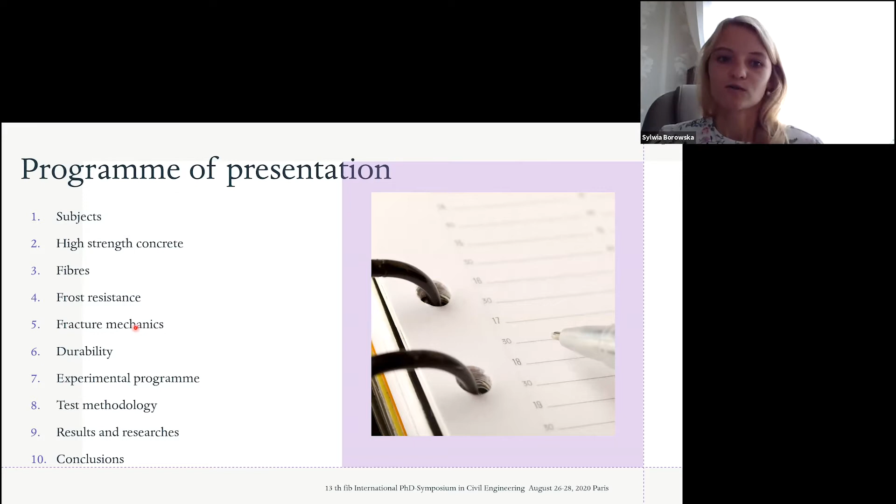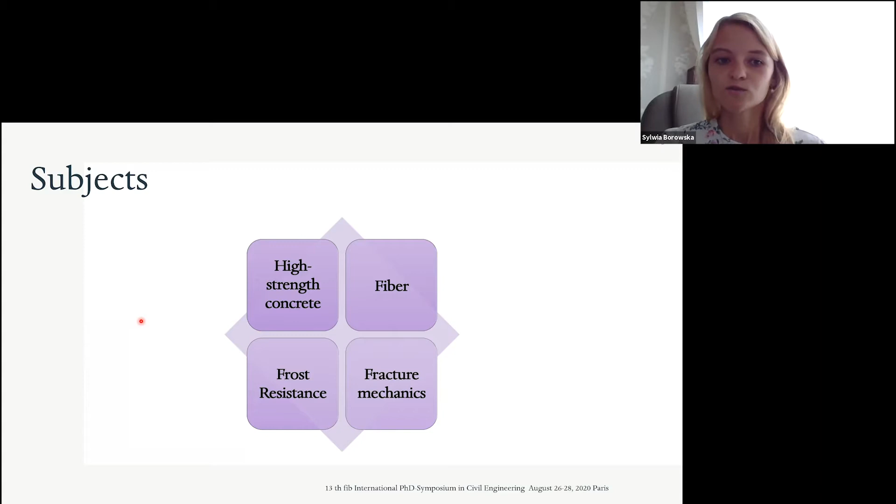My presentation is structured as follows. The aim of the presentation is to describe frost degradation of high-strength concrete by compressive strength change, mass loss, and durability factor change, and then to compare with the modification of stress intensity factor, fracture energy, and crack mouth opening displacement after 150, 250, and 350 cycles of freeze-thaw.

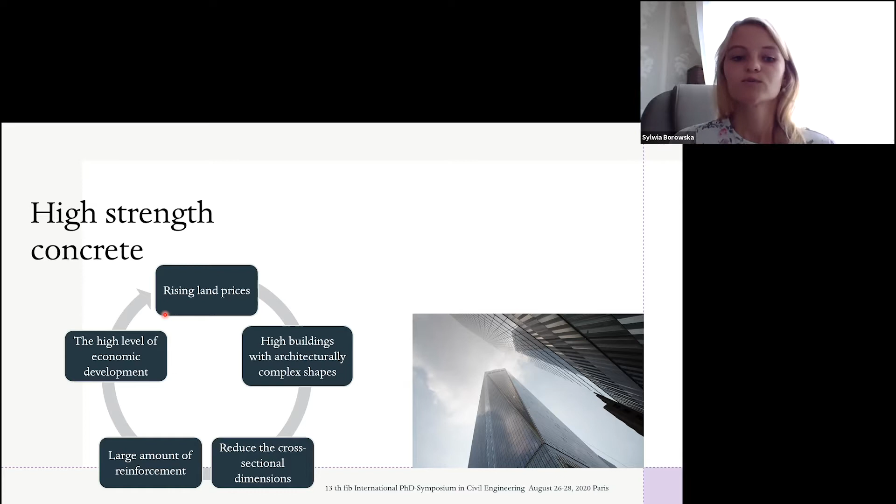The modern construction industry, which aims to create monumental buildings breaking records of height and span, is looking for innovative solutions to use structural elements that are safe in terms of load capacity and resistance to external conditions. Rising land prices in industrialized countries lead to a change in construction trends, with increasingly higher buildings with architecturally complex shapes. Due to the functionality and economical approach of the building, the main reason for using high-strength concrete is to reduce the cross-sectional dimension of the element.

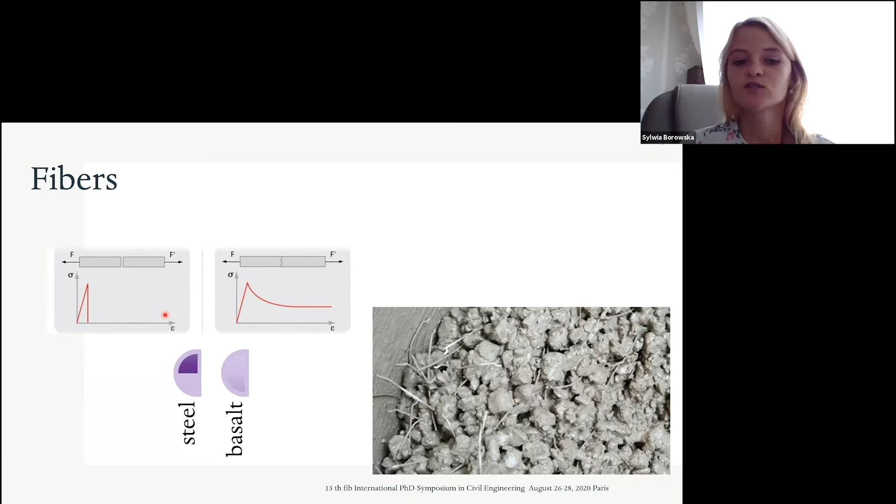High-strength concrete, despite numerous advantages, is a quasi-brittle material. The addition of steel and basalt fibers to high-strength concrete changes it into a quasi-plastic material, preventing a sudden brittle fracture in load condition. Numerous publications and works confirm the beneficial effect of adding fibers on the mechanical parameters, but little attention has been paid to the stability of high-strength fiber reinforced concrete to external environmental factors.

Durability is one of the most important parameters describing modern buildings. It has a significant impact on behavior, appearance, and usability of the objects. In the process of construction, material wearing out results from the destructive influence of external environmental interaction and improper exploitation.

With proper mechanical properties, the durability of the structure under extreme environmental conditions must also be ensured. Concrete not resistant to cyclic freeze-thaw loses its aesthetic appearance and, what is most important, its strength parameters assumed during the design are reduced.

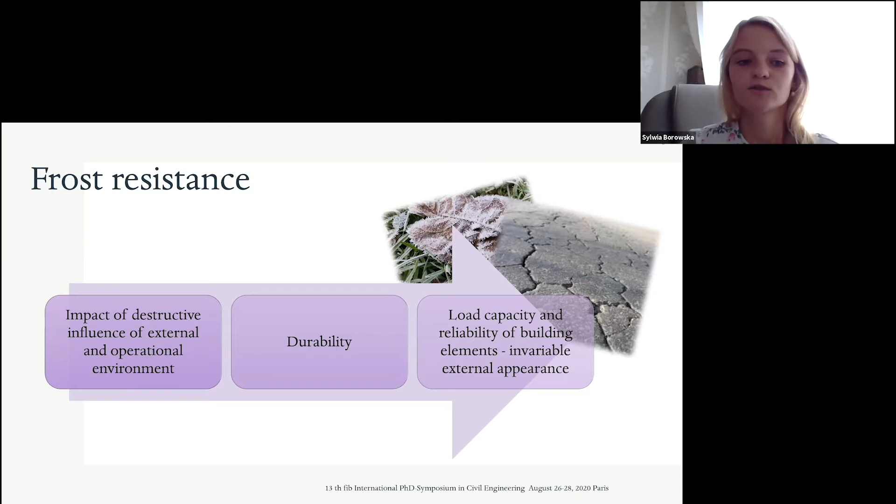Conventional calculations of structural elements are based on the assumption that the materials are an ideal continuum, have no defects, discontinuities, and changes in the structure resulting from the influence of external conditions. Despite the safety factors used in construction dimensioning, the results of analysis are characterized by high randomness. Several discontinuities and defects of material may be the beginning of fracture development.

High-strength concrete is characterized by a rapid increase in initial strength, which leads to the initiation of numerous places with different characteristics of primary deformation. Insignificant in the initial period of existence of concrete elements, discontinuities may, as a result of destructive environmental impact, lead to the catastrophe of the structure.

The connection of fracture mechanics parameters with the degree of damage as a result of cyclic freeze-thaw leads to a more precise description of the integral degradation of high-strength concrete.

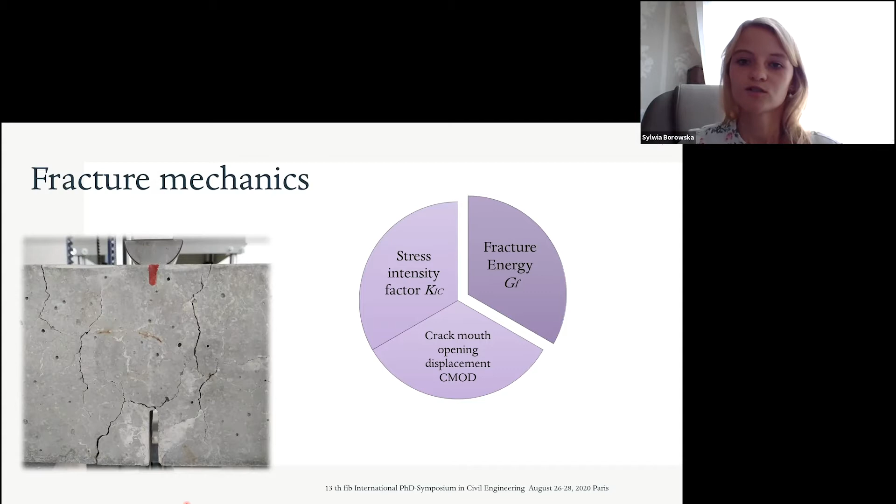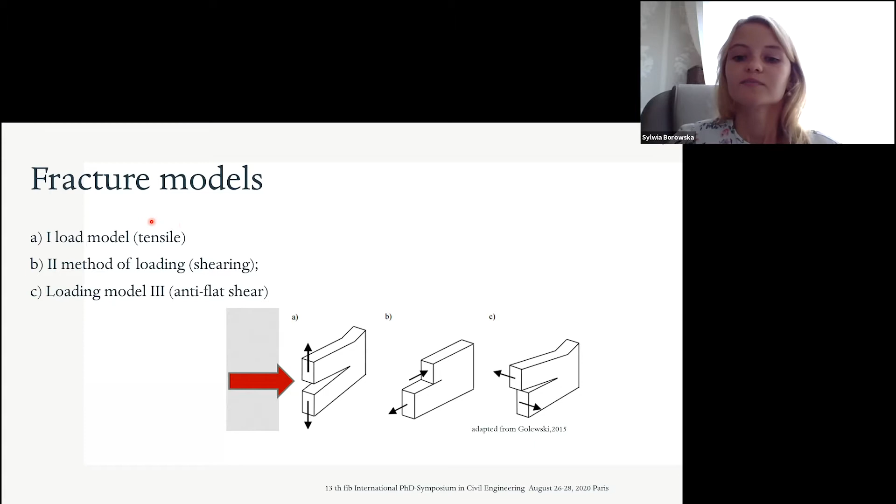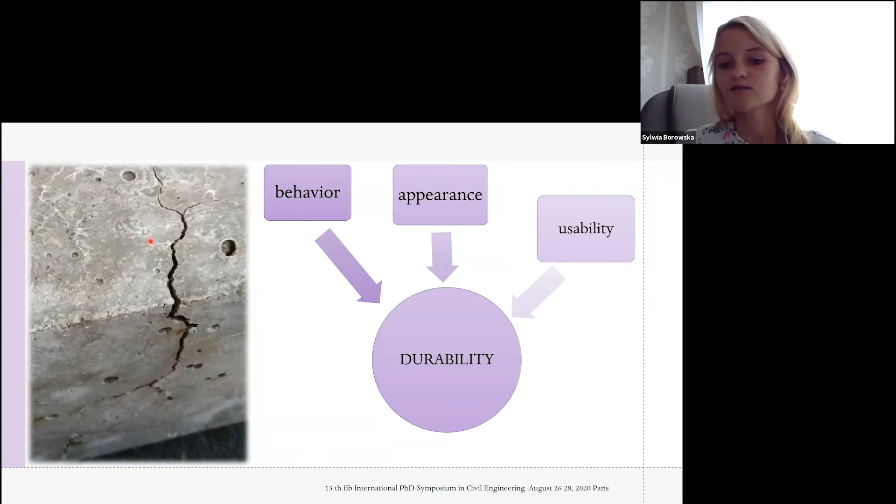In my research, I focus on stress intensity factor, fracture energy, and crack mouth opening displacement. This paper presents the results of experiments concerning determination of the resistance to cracking according to the first model of fracture, tensile and bending. The key point here is the durability of high-strength and high-strength fiber reinforced concrete.

Let's turn to my experimental program. The test was carried out on concrete with a compressive strength of 90 megapascals in order to analyze the effect of addition of fibers to high-strength concrete on their resistance to cyclic freeze-thaw. Steel and basalt fibers were used. In all series, a constant water-binder ratio was provided.

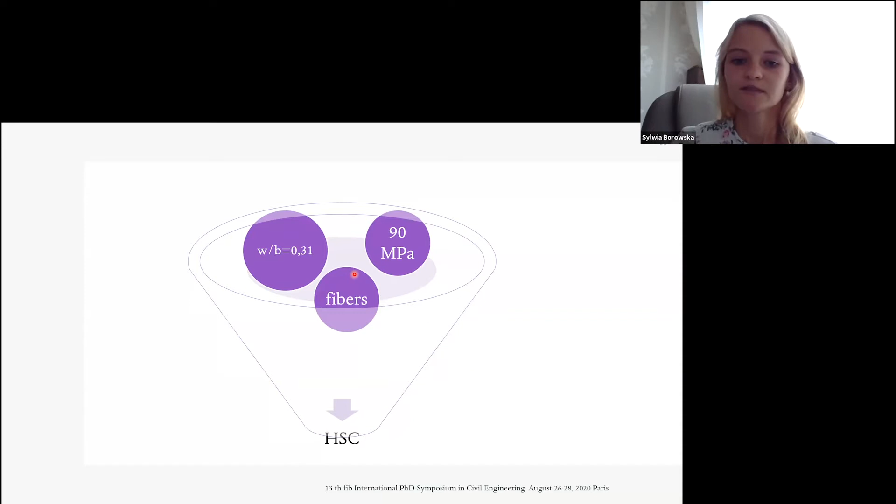For the research, concrete used Portland Cement 1 in an amount of 440.5 kilograms per cubic meter. The max grain size of the gravel used was 11 millimeters. River sand of 0 to 2 millimeters grain size was applied.

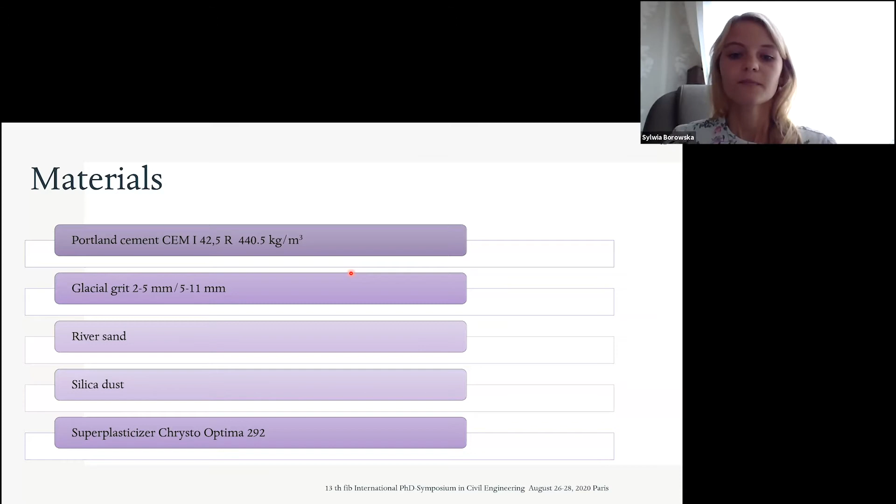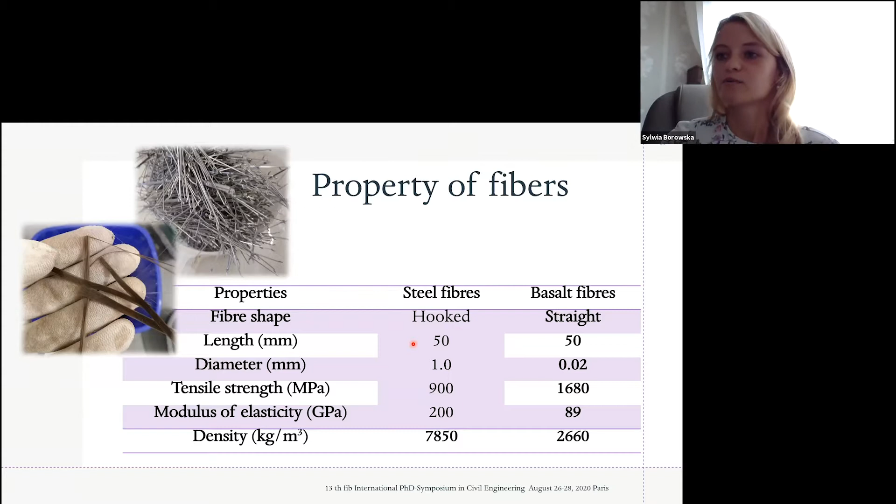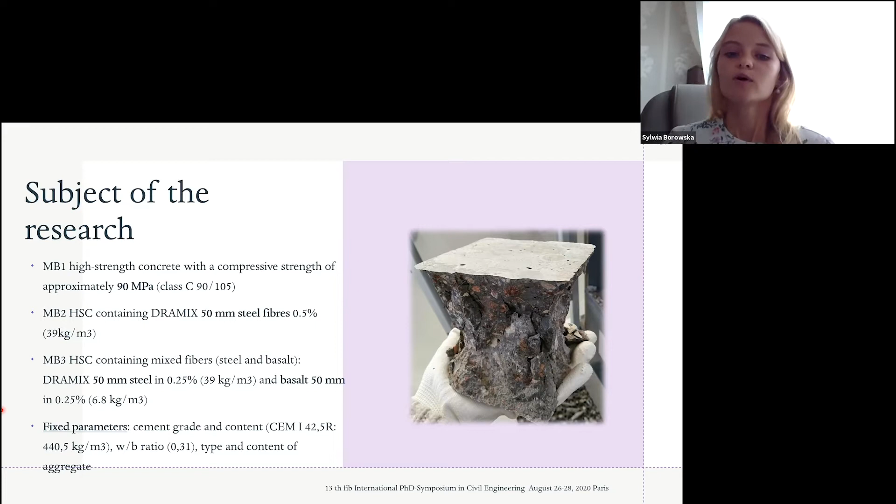The properties of fibers implemented in high-strength concrete are as follows: hooked steel fibers and straight basalt fibers, 50 millimeters long. Three types of samples were made: MB1, high-strength concrete without fibers; MB2, high-strength concrete with 50 millimeter steel fibers in amount of 0.5%; and MB3, high-strength concrete with 50 millimeter long steel fibers and 50 millimeter long basalt fibers, 0.25% each.

Now, I would like to describe sample preparation.

During the mixing process, the aggregate was mixed dry with cement and silica dust, before applying half the water and superplasticizers.

When the fibers were added to the concrete mix, the amount of superplasticizers was increased to maintain the consistency of the mix and to prevent the formation of empty space associated with worse workability.

The fibers were added to the concrete mix in stages, alternating with a mixture of water and superplasticizers, to prevent the formation of hybrid fiber clusters.

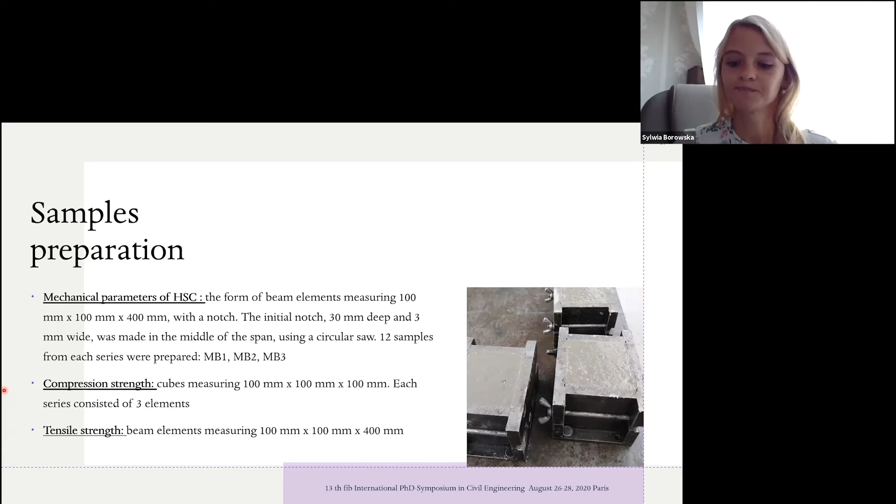These figures illustrate the geometry of samples used to specify the fracture mechanics parameters, and the loading scheme of the test.

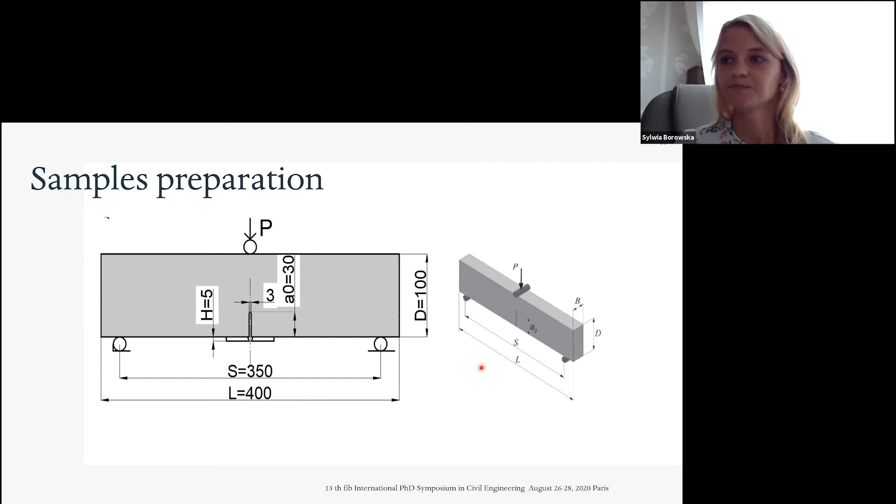Test methods used to research durability factors are based on American standard methods. The value of the DF factor was determined according to this formula. By the American standards, concrete is considered not resistant to freeze-thaw cycling when DF is lower than 60%.

In these figures, you can see stands for the resonance frequency measurement and the necessary tools and program used. Every 50 cycles, the decrease in high-strength concrete frost resistance was controlled by measuring the change in the sample's length and modulus of elasticity.

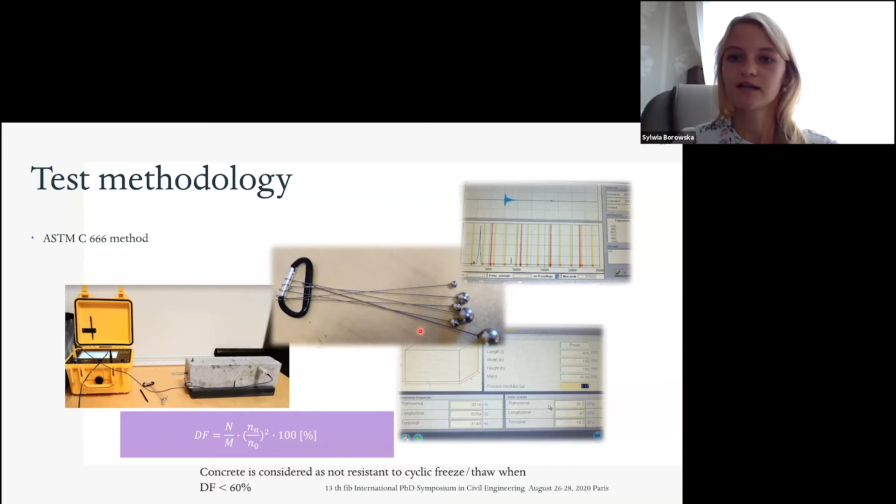The fracture mechanics parameters were determined on the basis of RILEM recommendations and the methods developed by Jenq and Shah, using the 3-point bending test.

The force was applied in such a way that the max load was reached within 5 minutes from the start of the test. The load was carried out by adjusting the displacement of the piston. The crack mouth opening displacement was measured using a plate extensometer.

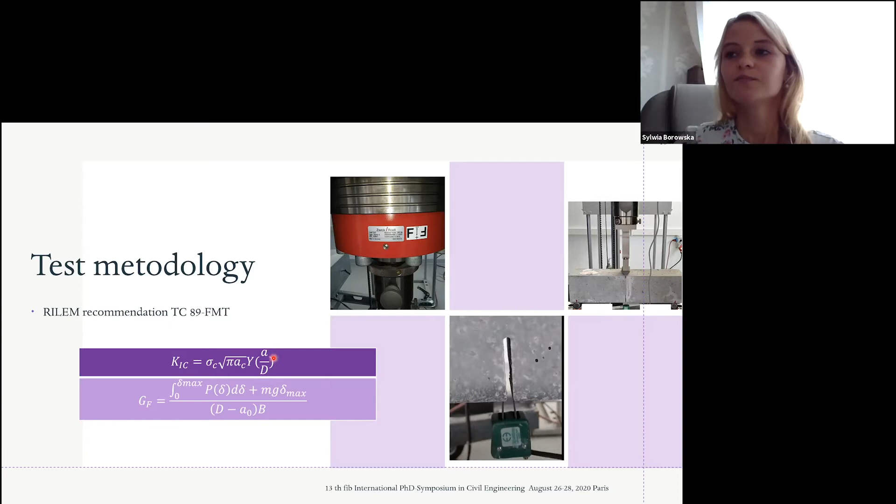We can see two formulas, for the stress intensity factor and the energy absorbed during the fracture process, used to research these parameters. The internal frost resistance test by means of loss of mass

and compressive strength were carried out according to the following procedure. The samples were thawed in the water, frozen in the air, and thawed in the water again.

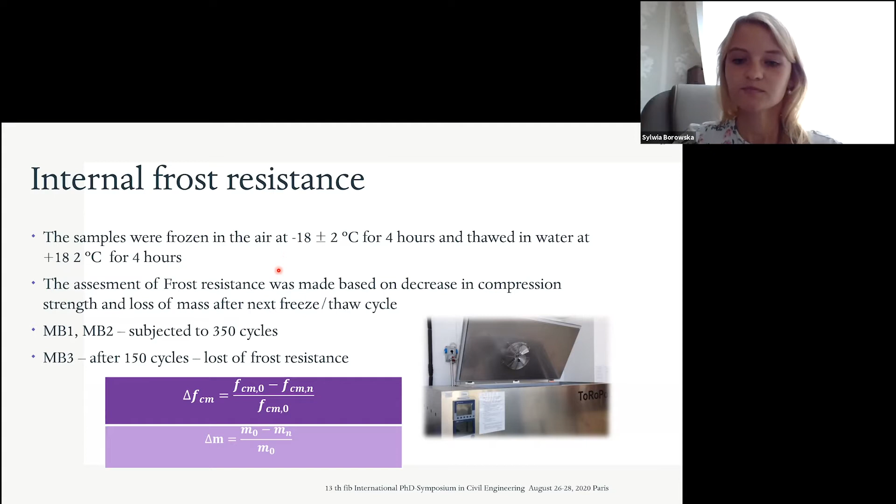Let's move on to the results. The physical properties of high-strength concrete after 28 days of curing are as follows.

Water absorption increased by about 30% when fibers were added to the cement matrix. Concrete with the mixture of steel and basalt fibers was characterized by the biggest absorbability.

The increase in absorbability in the case of the combined fibers in the concrete was caused by a decrease in the tightness of its structure and noticeable loss of bonding of basalt fibers in concrete.

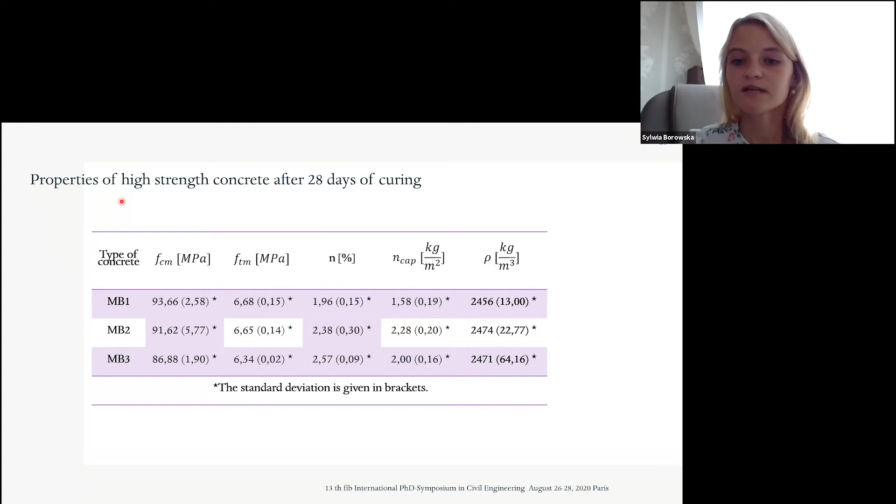The presence of fibers in the matrix of high-strength concrete caused a slight increase in the volumetric density. The conversion of half of the steel fibers into basalt fibers in the MB3 series concrete made it possible to reduce the capillary absorbability.

This table shows the results of the analysis of the stress intensity factor, critical crack tip opening displacement, and the fracture energy. The results show the improvement of fracture energy and fracture resistance of high-strength concrete by adding steel fibers and mixed fibers.

But after 150 freeze-thaw cycles, there is a decrease in the stress intensity factor values of concrete with steel and basalt fibers. Concrete with a mixture of steel and basalt fibers has lost its resistance to fracture after

150 cycles of freeze-thaw. The value of the critical crack tip opening displacement in this case is highest.

The fibers didn't stop the uncontrolled propagation of the critical crack mouth opening displacement, and thus the brittle fracture. In the case of a limited amount of fibers contained in the concrete, it is crucial that they are properly placed in the cement matrix.

High-strength concretes with steel fibers had the highest fracture energy after 250 freeze-thaw cycles. The fracture energy increased as a result of crack bridging by the most resistant steel fiber anchorage.

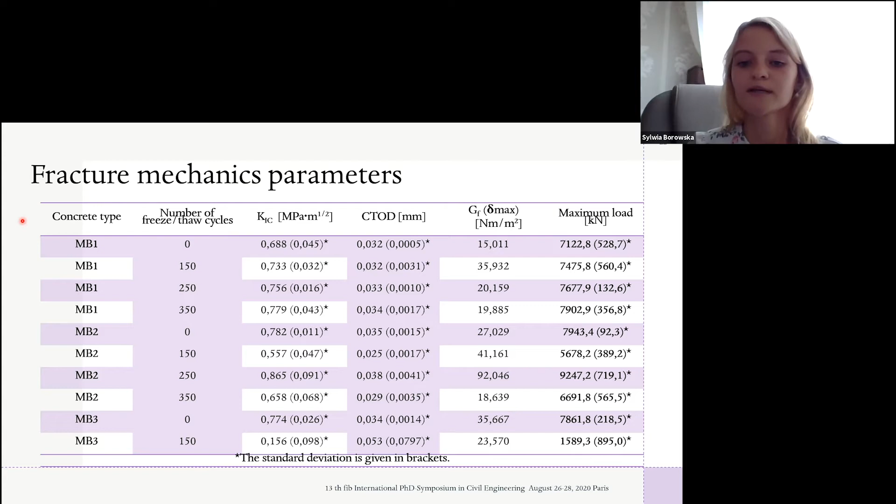This type of concrete, up to 350 freeze-thaw cycles, didn't undergo the degradation described by the deterioration of fracture mechanics parameters.

These figures show the maximum load as a function of the crack mouth opening displacement. The ductile behavior of the MB3 series concrete after 150 freeze-thaw cycles were shown. The addition of basalt fibers in the cement matrix caused the elongation of the deformation segment until the maximum load is reached. The nature of the work of concrete with the addition of fibers in the cement matrix is clearly changed from quasi-brittle to quasi-plastic, shown by the elongated shape of the MB2 and MB3 series curves. After 350 cycles, no significant effect of freeze-thaw was observed on high-strength concrete without fibers. These concretes are characterized by a larger range of elastic deformation, as shown in Figure 1, and at the same time lower resistance to fracture.

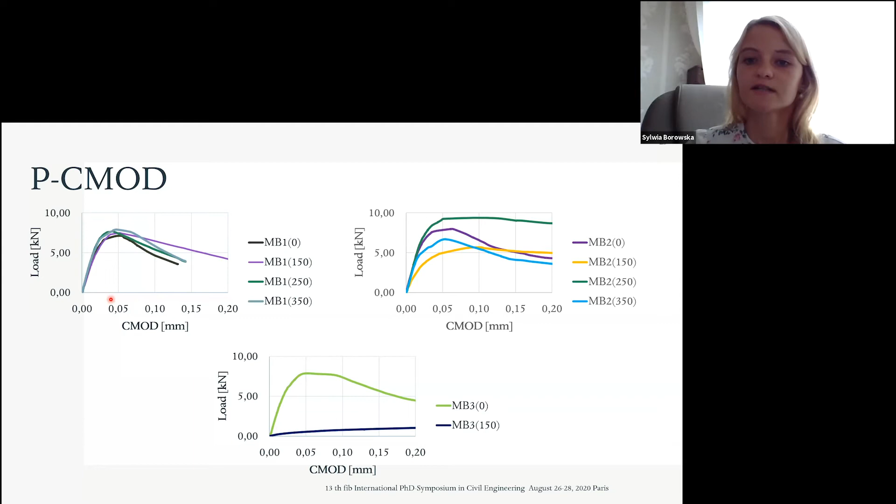Due to the more homogeneous structures and fewer voids, MB1 series concrete didn't degrade as a result of cycling through freeze-thaw after 350 cycles.

None of the tested concretes showed a loss of resistance to cycling through freeze-thaw, described by a decrease in mass and compressive strength, shown in this table.

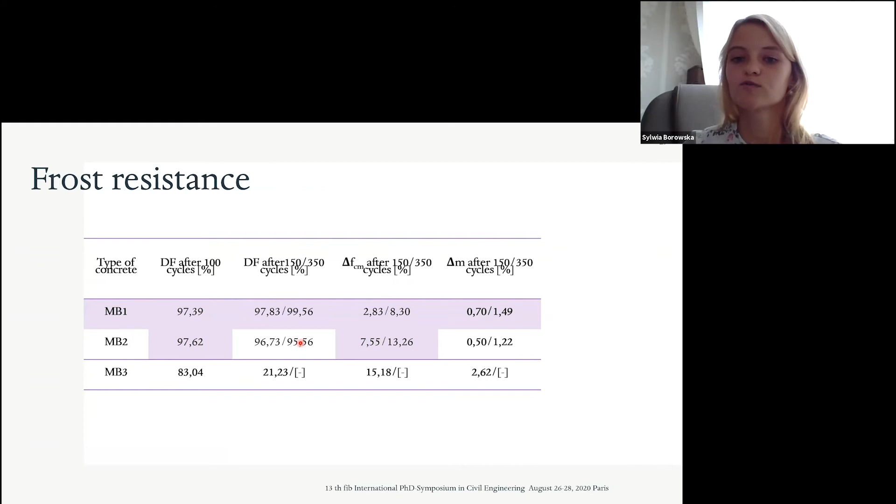Concrete with mixed fibers, steel and basalt, after 150 freeze-thaw cycles underwent numerous cracks, and the modulus of elasticity dropped by nearly 80%. The decrease in the value of modulus of elasticity after 150 cycles, in the case of the analyzed high-strength concrete with mixed fibers, corresponds to a decrease in the value of stress intensity factor by about 80%.

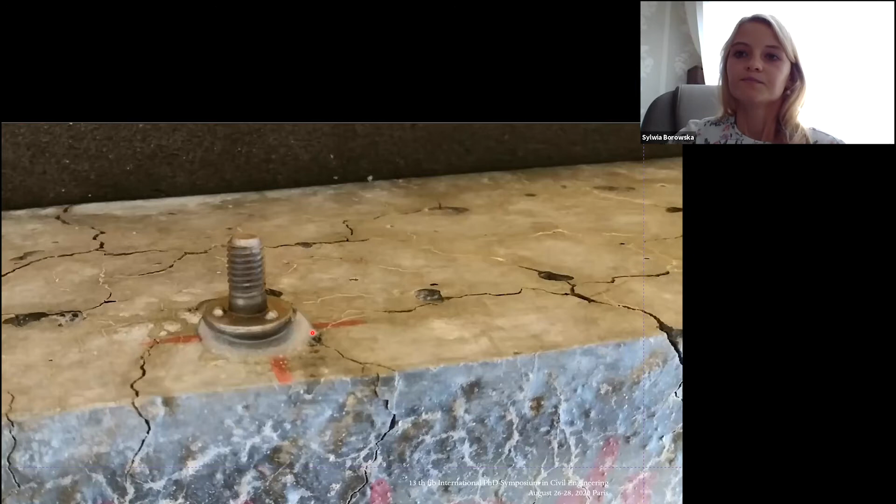In conclusion of my research, the fracture mechanics parameters of MB2 and MB3 series concretes improved due to the fibers present in the high-strength matrix, but deteriorated with subsequent freeze-thaw cycles. The higher the energy absorbed during fracture formation, the more resistant the material is to brittle fracture. The addition of fibers to the concrete increased the absorbed energy when the cracks reach the fiber, slowing propagation.

The cycling through freeze-thaw leads to the destruction of concrete with mixed steel and basalt fibers. The fracture mechanics parameters of the MB3 series concrete were significantly deteriorated. Similar critical crack tip opening displacement values were observed for high-strength concrete with mixed fibers and steel fibers before they were subjected to freeze-thaw. This means that replacement of half the amount of steel fibers with basalt fibers doesn't cause significant change in fracture inhibition.

It's important that the steel and basalt fiber volume content of the concrete should be more than 0.5% in order to prevent the propagation of stress fractures caused by the cycling through freeze-thaw of high-strength concrete, by crack-bridging fiber properties. The frost resistance of high-strength concrete is associated with absorbability.

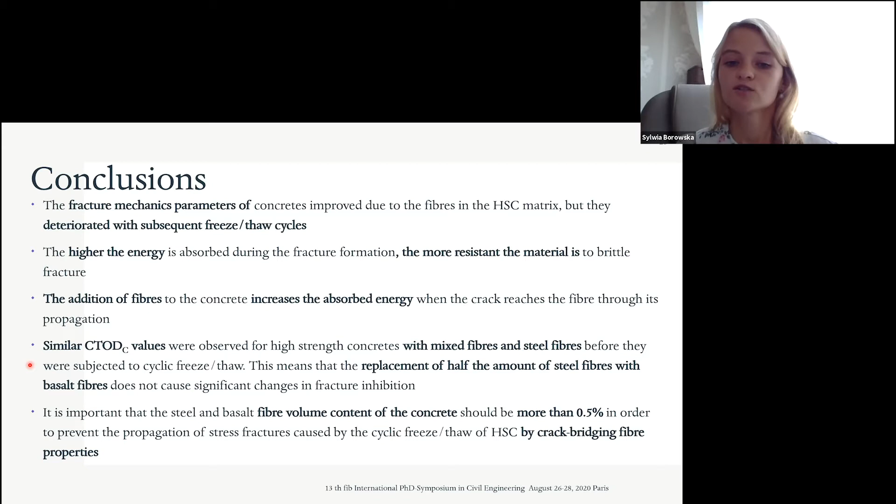Cycling through freeze-thaw in the initial phase contributes to the increase of fracture energy. However, as the frost degradation process continues, the fracture mechanics parameters deteriorate. The increased absorbability of high-strength concrete with fibers resulting from pore regions leads to a concentration of tensile strength in these areas as a result of cycling through freeze-thaw, and as a consequence, to internal degradation of the concrete.